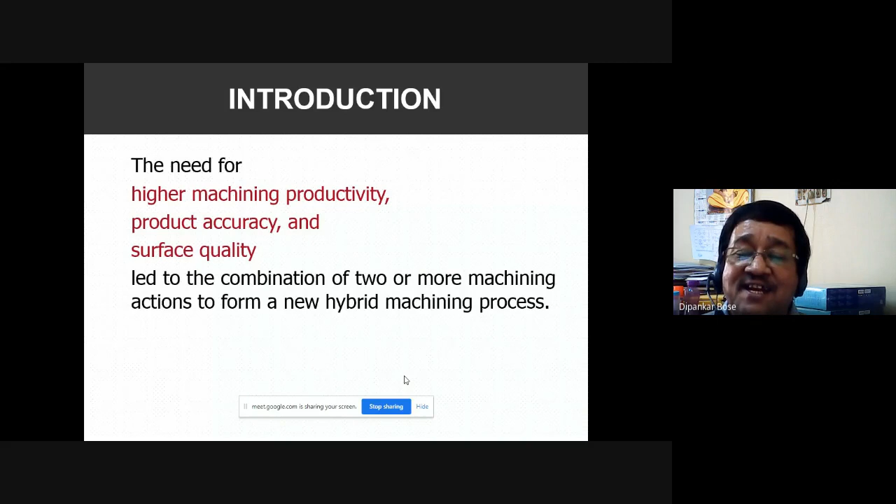Tougher material, harder material, stronger material - all these are very difficult to cut. So I am telling you one important thing - the lathe, milling, shaper, these are all conventional machines, only for mild steel. This era is gone almost.

Most important thing, even in welding operations - most colleges have welding machines that are actually transformer based. But nowadays, most welding machines are developed into inverter based, to reduce the power consumption.

Now what happens, students - what they are learning in college is transformer based machines, but when they go to industry, all machines are converted into inverter machines. So there is a lot of gap there.

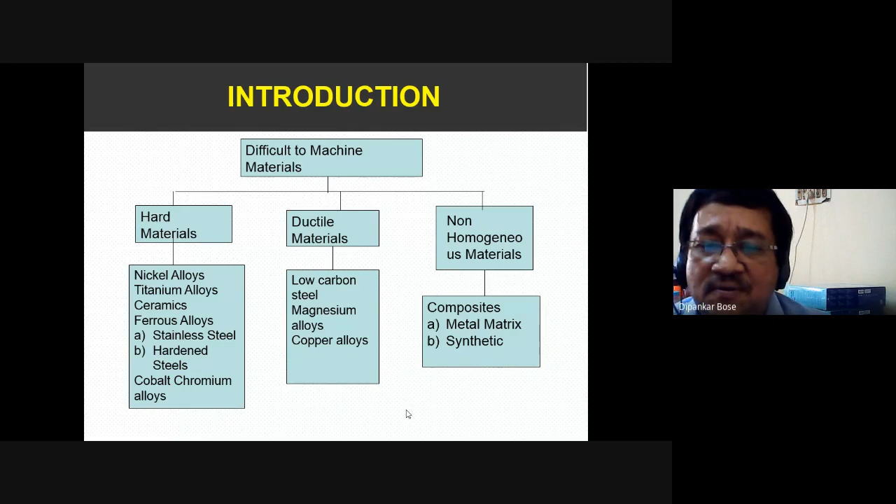Hello my dear friends, have you heard about nanotechnology? Am I audible to you? Yes sir, yes sir. So have you heard about nanotechnology? Yes sir. What is meant by nano?

The size is 10 to the power minus 9 meter. But why is it so important? You got my point? Because the property of the material changes when it is sized to nanosize. For example, suppose your graphite, your pencil lead - this is the most brittle material. But when this graphite is sized to nanoscale, it becomes the world's hardest material, called carbon nanotube. So the property of graphite changes when sized to nano. This technology is coming into use now all over the world.

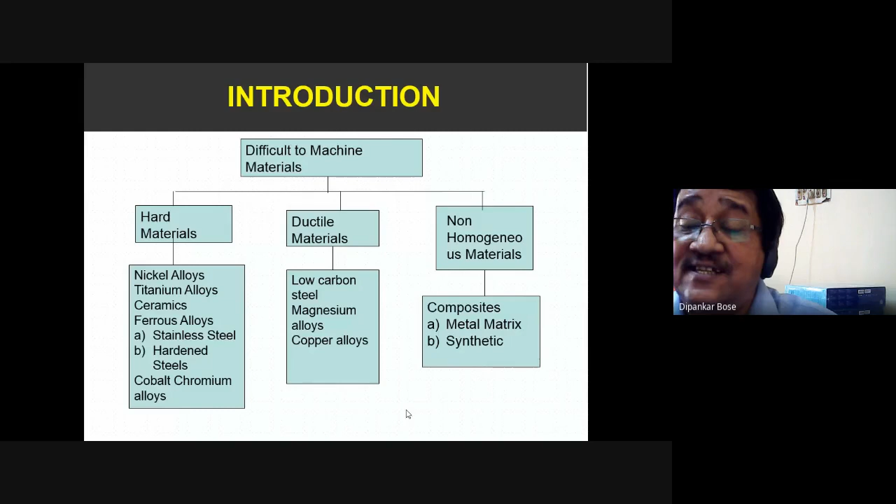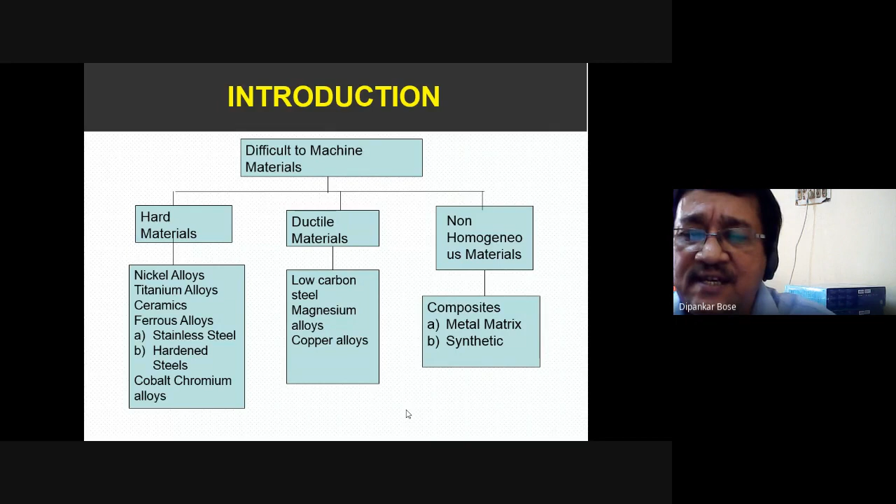But most important thing is there are some nanofluidic channels - they are doing a lot of havoc in the manufacturing world. It has been observed - I think you have heard about Intel. The owner of Intel, Gordon Moore, said that the size in a PCB, printed circuit board, you can suppose add 100 types of resistance or whatever components in a space in the PCB. After 18 months, it becomes two times - it can accommodate. But the problem is, when so many components are clubbed together, tremendous amount of heat is dissipated.

Now to remove this problem, what have they done? They have introduced nanofluidic channels. You got my point? Nanofluidic channel does not obey Ohm's law, so naturally there won't be any heat generation - it can be easily compensated by the nanofluidic channel.

Another important thing - I think all of you know about smart materials. What is that? Can anybody tell me?

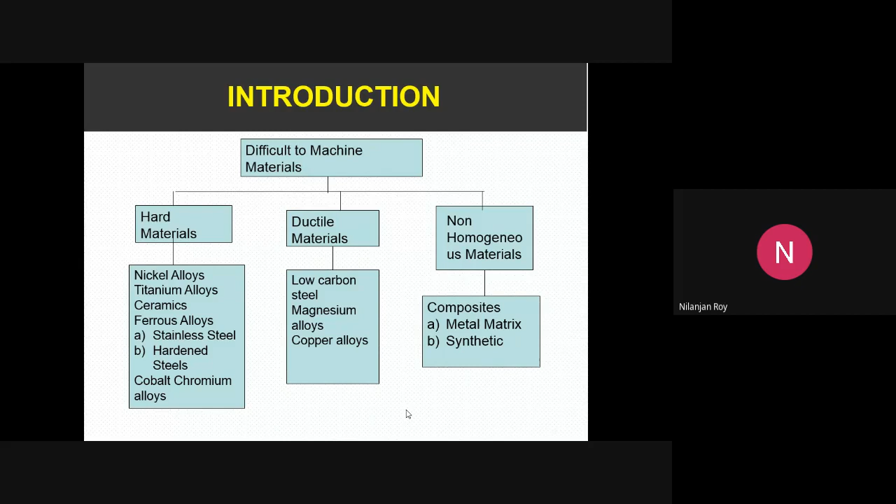Because of manufacturing world advancement - good afternoon, sir. Yes. Smart materials means they can change their shape, we can use some machining process, they can shape their shapes by their own. That means... yeah, nowadays you can see, sir, recently one material is developed - that is self-healing material. Recently. Yes, memory sir, there are memory materials. Yes sir, yes sir, another material is there.

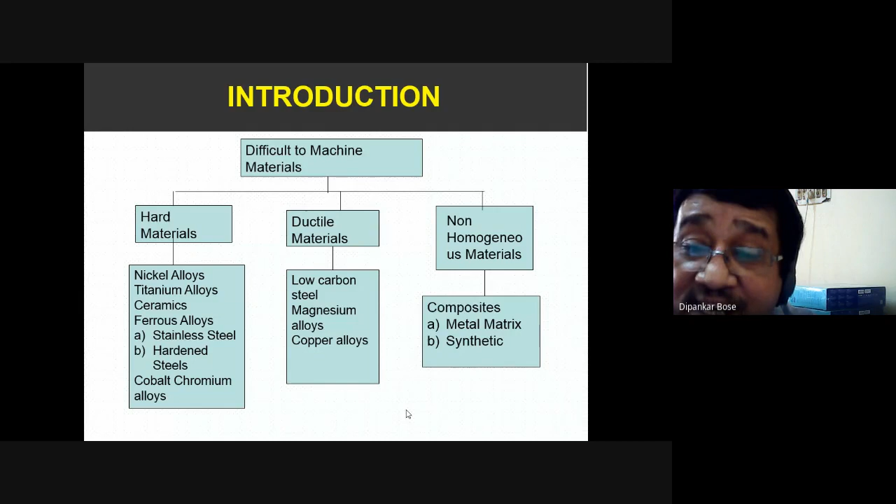Actually smart materials are non-metals, but they can conduct electricity. So the main intention for technocrats or scientists was that use of metal should be minimum. So they have developed this component, which is an organic type of component, but it can conduct electricity. So you think about your mobile phone nowadays - how much percentage is metal? Very less. You think about your new car - how much percentage is metal? Very less, in comparison to others.

Now, my dear friends, coming back to my lecture - suppose titanium. It is a very widely used material in aerospace. You know, two branches of engineering apart from computer science or IT will be very much in demand in the coming era - one is aerospace engineering, another is automobile engineering, hybrid vehicles and others. In aerospace materials, titanium is widely used, and also in medical industries.

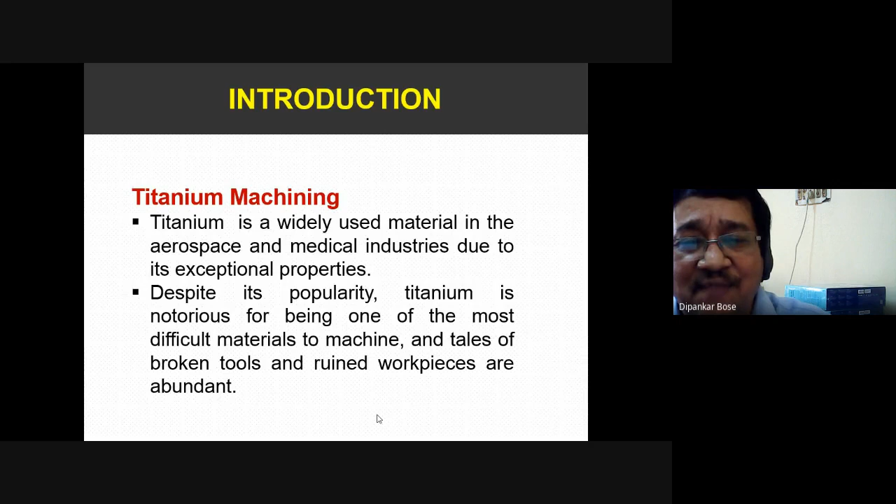It has got some exceptional properties, but it is a very notorious material - very difficult to machine. So many tales of broken tools, ruined workpieces are abundant. So titanium is one type of culprit material.

Now another important thing is Inconel machining. It is a trademarked word of Special Metals Corporation - a high nickel superalloy. It is actually resilient to corrosion and oxidation at higher temperatures when it is used, and it is also used in aerospace industry, but it is very difficult to machine because it does not get any softer when the temperature rises.

At the same time, you may think about cold working, but cold working increases its hardness, making it difficult to machine. But when Inconel is machined, its hardness increases non-linearly, wearing the tool disproportionately. So this is another difficult to machine material.

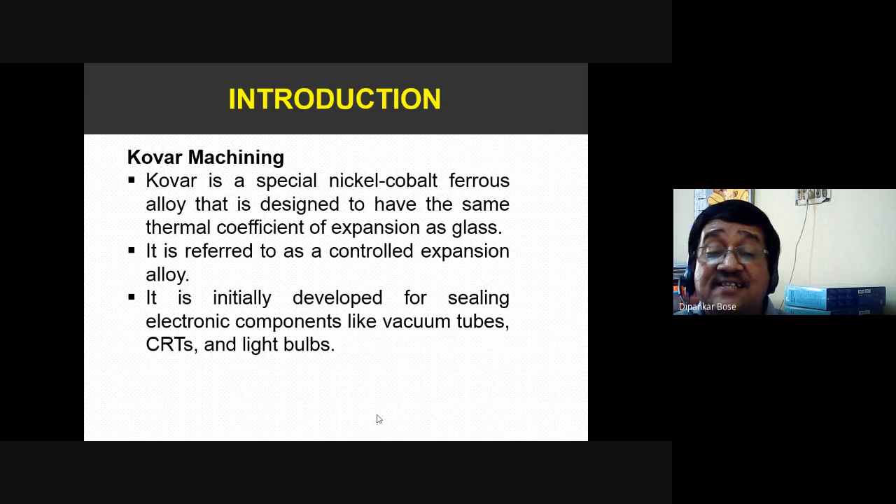Another important thing is Kovar. Kovar is also a special nickel-cobalt-ferrous alloy, designed to have the same thermal coefficient of expansion as glass. It is known as a controlled expansion alloy, and was developed initially for sealing electronic components like vacuum tubes, CRTs, and light bulbs. Normal metals don't work for this purpose because they expand and contract readily with changes in temperature, breaking the seal. So, like most nickel alloys, Kovar also exhibits work hardening when machining, slowing the machining process and even warping the work.

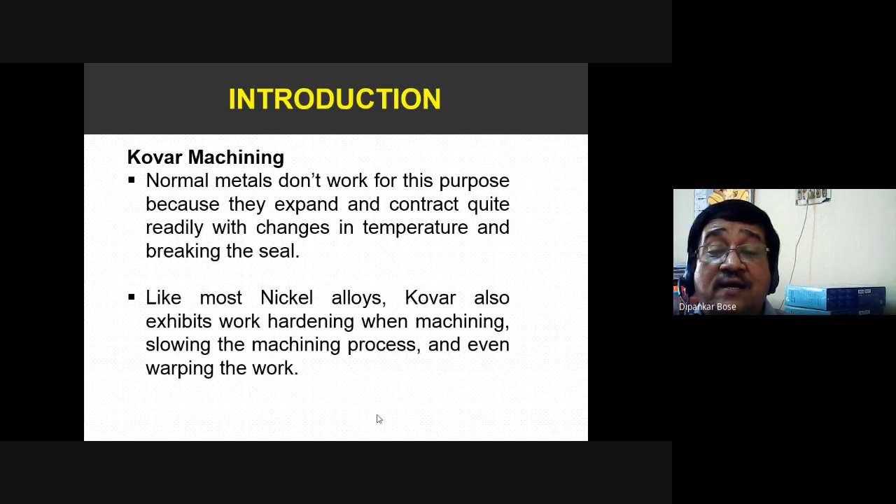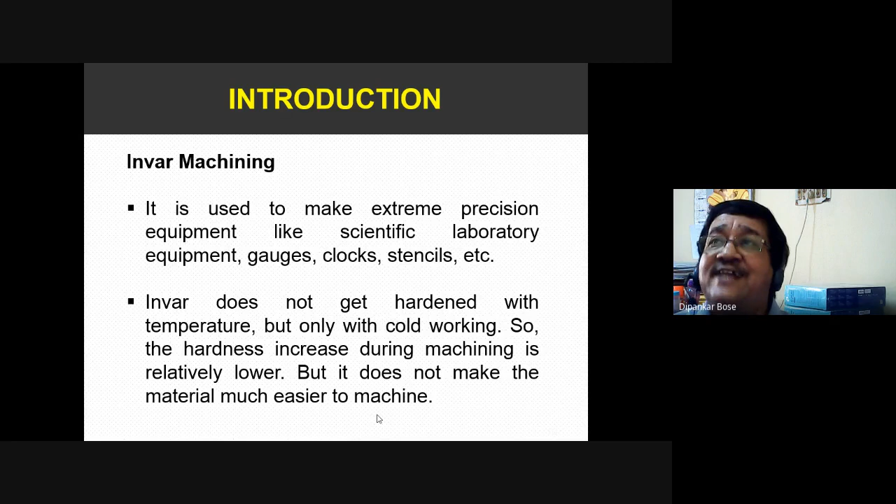Now another important thing, Invar. It is a nickel-ferrous alloy with extremely low thermal expansion. It differs from Kovar in that Kovar is a controlled expansion metal with the same coefficient of thermal expansion as borosilicate glass, whereas Invar is an extremely low coefficient of thermal expansion metal. It is used to make extreme precision equipment like scientific laboratory equipment, gauges, clocks, stencils, and the like. But another important thing is that Invar does not get hardened with temperature, but only with cold working. So the hardness increase during machining is relatively lower, but it does not make the material much easier to machine.

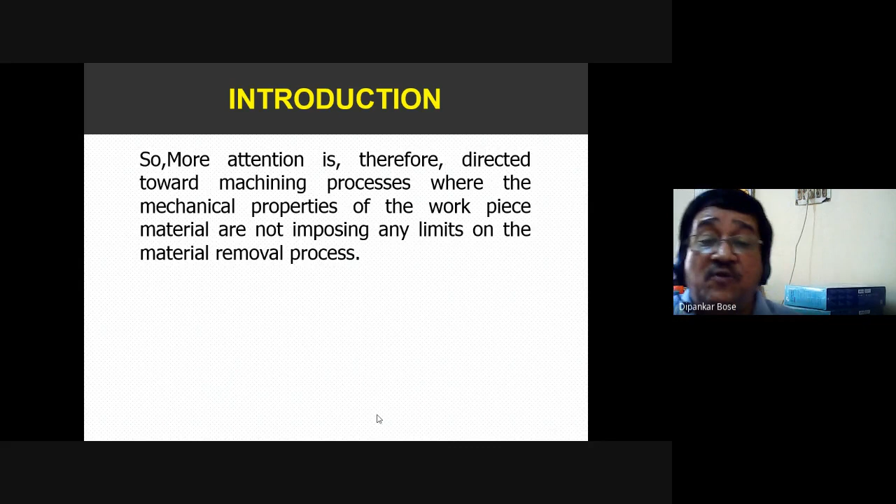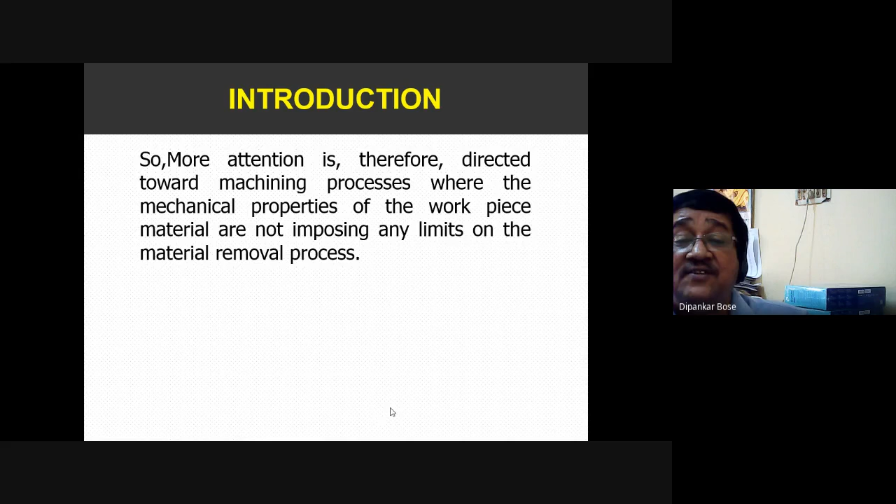So I am telling you some of the materials. There are plenty of materials that have been developed, but more attention is directed towards machining processes where the mechanical properties of the workpiece are not imposing any limits on the material removal process. So unconventional machining techniques came into practice, but this is not so much as per the requirement.

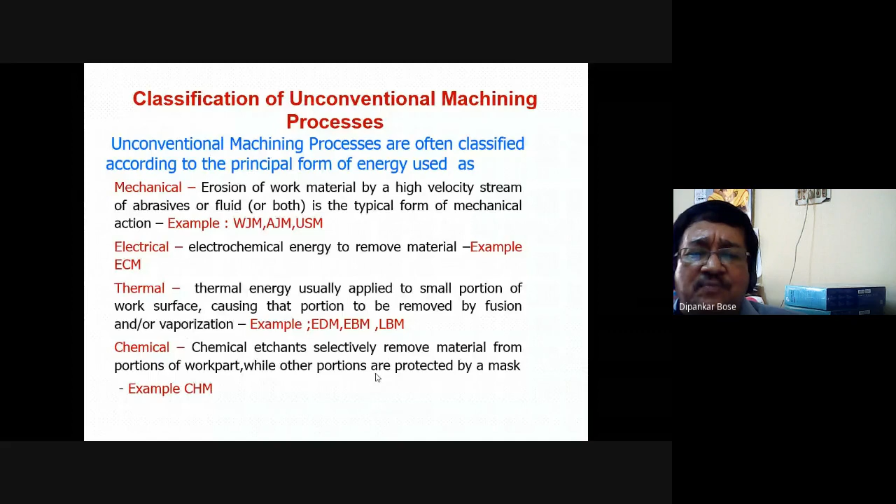So for unconventional machining, I don't want to say so many things, because everything comes into picture: mechanical type, water jet machining, abrasive jet machining, ultrasonic machining, electrical energy utilization like ECM, thermal means EDM, EBM, LBM, and chemical machining. Now, why hybrid machining?

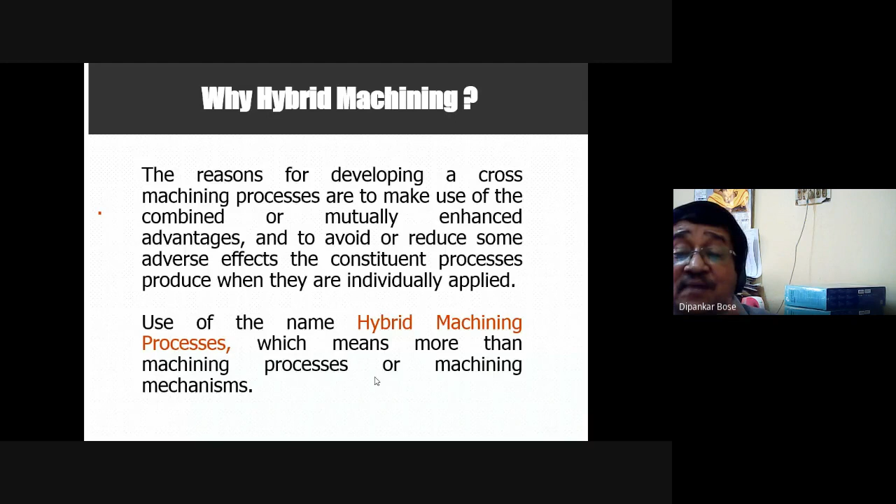Now I am coming to the picture. Combinedly, mutually enhance the advantages and avoid the adverse effects of the constituent processes produced when they are individually applied. Very nice, there are wonderful words in the definition. But why is it required? Why is it called hybrid? Because it will be more clear to you, here you see.

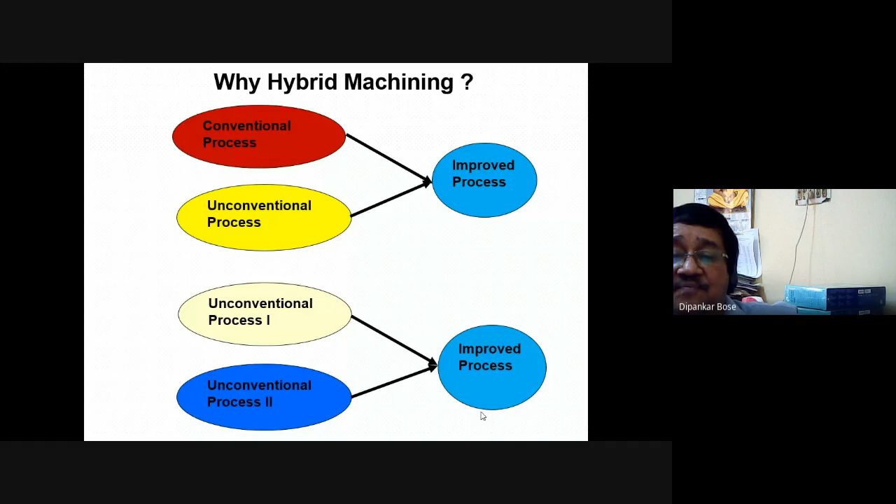Now, what are the advantages? Machinability, MRR is high, surface finish, accuracy. Long back when I worked with a die sinking type EDM machine, it used to take 5 to 6 hours to make the impressions, but we don't have this much time. We also have to make the MRR more, and at the same time, surface finish should be very accurate. So these hybrid machines will give you that requirement.

But there are some adverse effects also. Sometimes burrs are there, heat is maximum, sometimes residual stress will be there, inherent stress inside the structure, all these things. But if you consider, the advantages are more than the adverse effects.

Now, there are two categories of hybrid machining process: one where the processes are directly involved in the material removal. Another type of hybrid machine is there, where one will be the most principal machine, and others actually give some assistance to have better MRR and surface finish. Always remember the most important thing: why this hybrid machine? The main intention is better MRR as well as quality of the product.

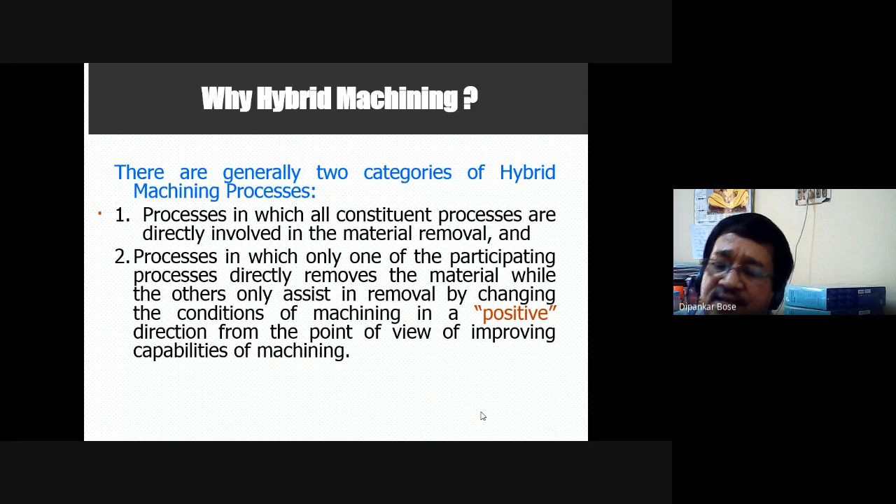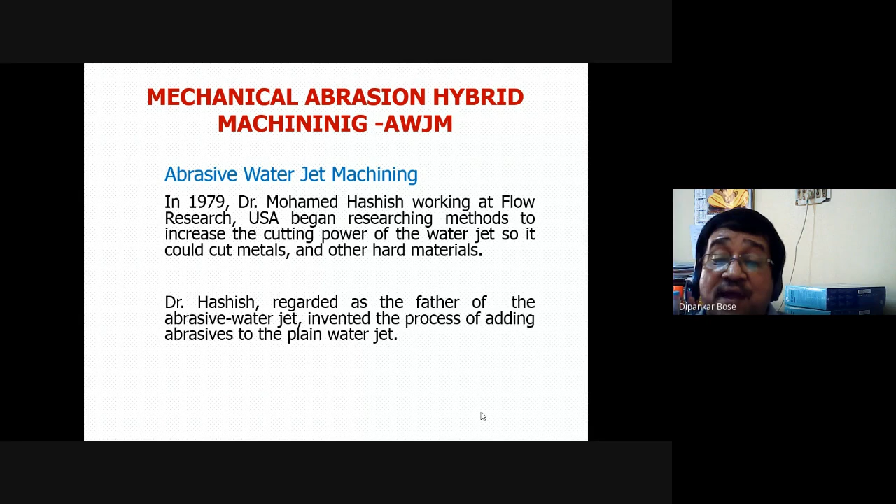Okay, my dear friend, first hybrid machining - I think all of you have heard of abrasive water jet machine, and it is not a very old one. In 1979, Dr. Mohamed Hashish, working at Flow Research in USA, started researching methods to increase the cutting power of the water jet so it could cut metals and other hard materials. Dr. Hashish is known as the father of the abrasive water jet, and invented the process of adding abrasives to the plain water jet. He used garnet abrasives, the same as used in sandpapers. Water jet containing abrasive could cut virtually any material.

In 1980 - how many years back? 40 years back - abrasive water jets were used for the first time to cut steel, glass, and concrete. And in 1983, the world's first commercial abrasive water jet cutting system was sold for cutting automotive glass, when the development was taking place for automobile engineering. At the same time, there were some sister organizations used to process the automotive parts, for how to cut and how to machine it.

Then this abrasive water jet machining is there. There is a saying in the industry that in a workshop, if you don't have a water jet machining setup, it is just like a carpentry shop without a hammer.

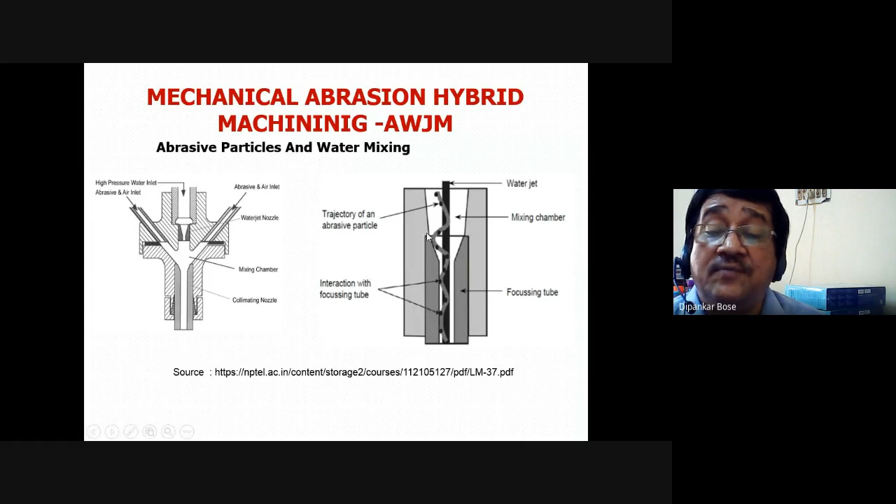So this is the way you can make the nozzle of this abrasive water jet. Now, my dear friend, please see how many intricate parts have been developed by this abrasive water jet. Can it be possible by our conventional machining?

No, sir. These are the things actually. But you are all very capable engineers here, those who are listening. You can develop this type of setup. It is only, your intention is required. Otherwise, innovate.

The owner of Facebook, Mark Zuckerberg, what he said about Indians, or his partner, I forgot who told this, but the statement is that Indians are very good in studies, fine. They are getting good jobs, they are purchasing Mercedes, but where is the innovation? You got my point? Am I right?

Whenever faculty members are coming to my place for training, I ask them, how old is your college? Fine, 20 years, 30 years, 10 years, somebody is 80 years. But when I ask, have you developed any product which is required for your surroundings and others, for mankind and others? The answer is a big zero. It is not their fault or our fault. Our education system is like this only. So this is the case.

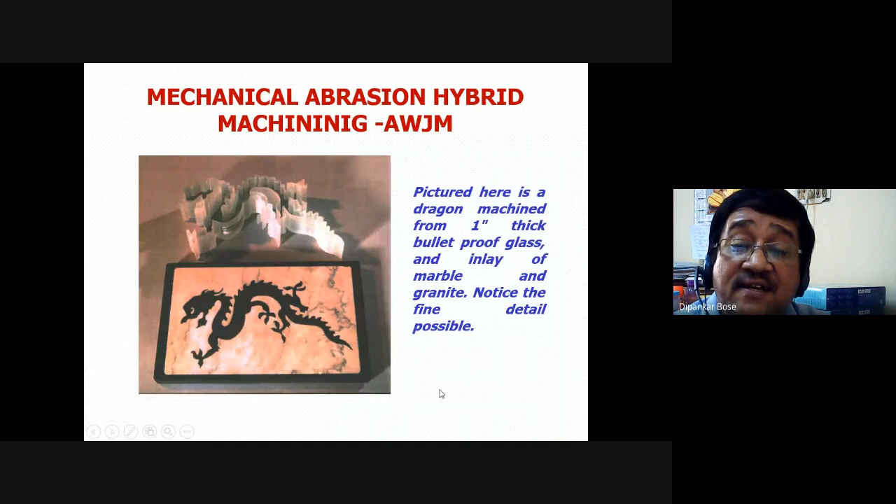Now, another hybrid machining is there. It is called laser hybrid welding. Do you have any idea? It is a combination of laser light and electrical arc.

Now, in welding, the most important thing is that MIG welding is the most versatile one. Why? Because when MIG welding is going on, there is no stoppage of continuous welding rods you are getting. It is an automated system.

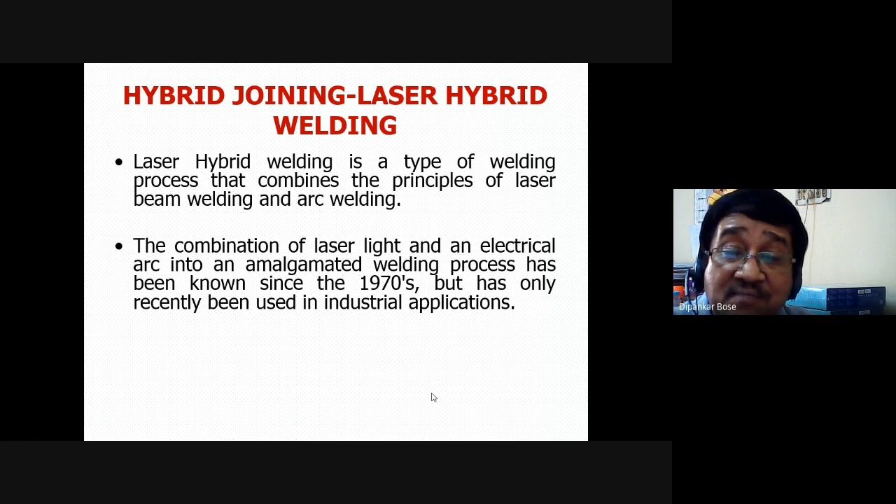So MIG welding and laser welding, both are combined. But it's difficult for TIG welding, because in TIG welding you need to keep the stick and your torch very minutely. TIG welding is an artist's welding, you got my point. But MIG welding is utilized for hybridization. With laser and MIG, if you visit most automobile industries, the joining of different parts of that car is done through hybrid machining. You got my point? So, laser hybrid welding.

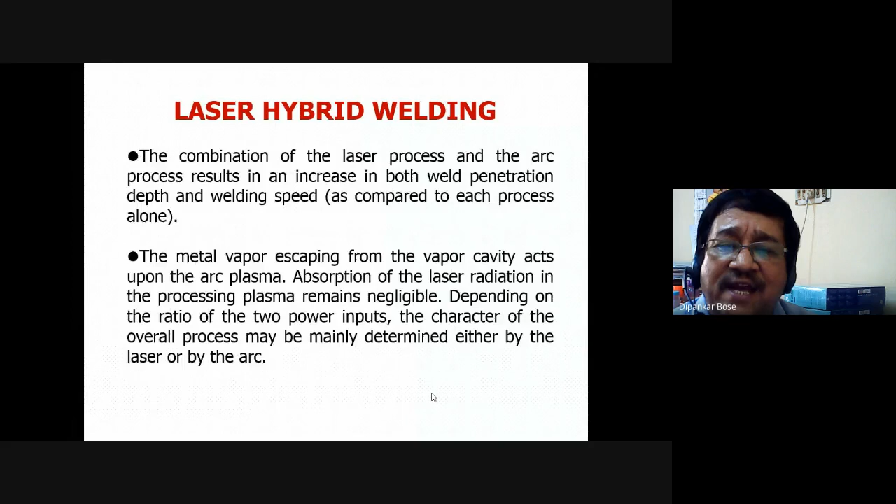See, my dear friend, what is MAG welding? What is MAG welding?

So it is very, very interesting. What is the job here, MIG welding or mag welding? Deposition. But what is the job of laser beam? Penetration. If you get the deeper penetration, quite obviously MIG welding will give the joining more deeper way. So the welding will become more strength, everything will become better.

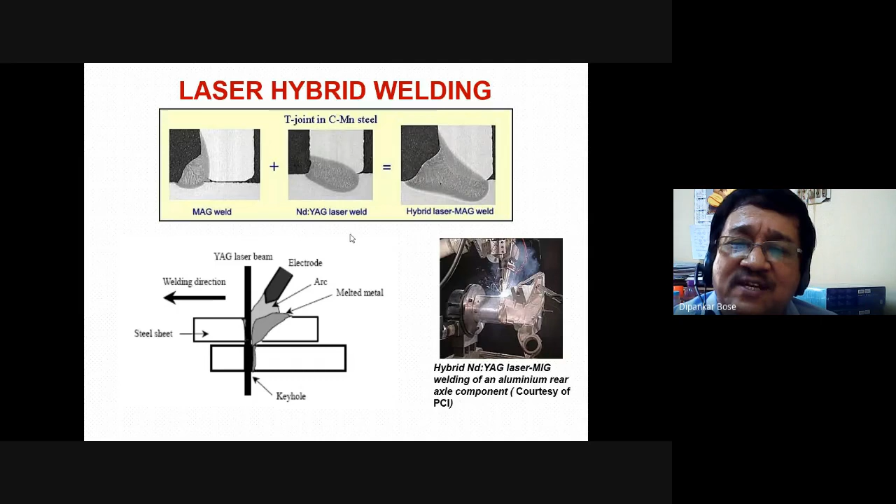Another important thing is that this is a very versatile welding, MIG and laser hybrid welding. Any question? And here you see, it is a joining of carbon manganese steel. Got my point? So this is a very unique type of process, and everywhere you go - Telco, Ashok Leyland, Maruti manufacturing unit - everywhere the common thing is that they are using laser hybrid machines.

Now first of all, let us think about hybrid electrochemical processes. ECM, Faraday's law. In our school level, we have learned about electroplating. Electroplating is deposition of material. But in ECM, electrochemical machining, it is the reverse - it is the removal of material. The mechanism is known as chemical dissolution or electrochemical dissolution.

Now, when this machining process is enhanced by using mechanical machining action or thermal assistance, ultimately what happens? What is the requirement? Higher MRR and improved surface quality. So if you think about thermally assisted processes, you can use laser beam, which heats the inter-electrode gap and enhances the dissolution process in laser assisted chemical etching. It is known as LAE, or laser assisted electrochemical machining.

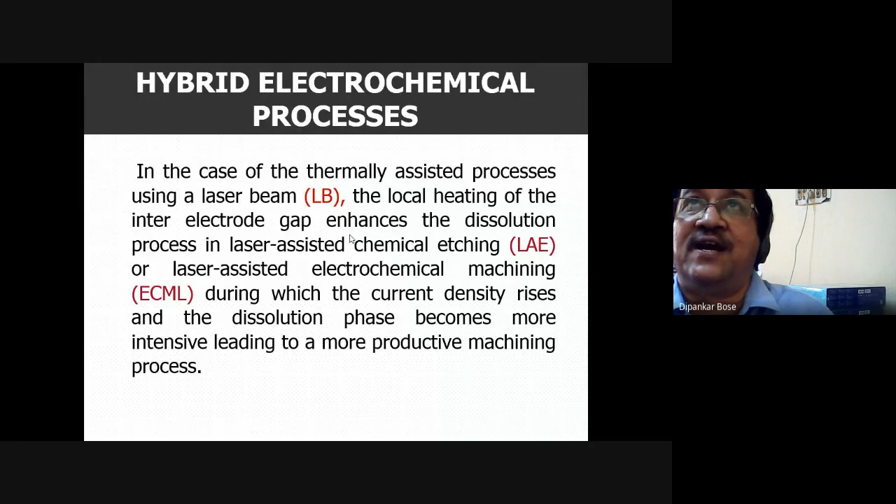During which, one most important thing - always remember when you are doing some machining operation, current density, current per unit area. The main intention is to raise that current density, and the dissolution phase becomes more intensive, leading to a more productive machining process. Why is this hybrid machining coming into picture? That is machining of difficult metals, but most important thing is to increase the MRR as well as the surface finish.

So there is a term called mechanical abrasion. It is combined with ECM and lot of hybrid processes - electrochemical grinding, electrochemical honing, and electrochemical super finishing. All these things, these are all hybrid processes, right?

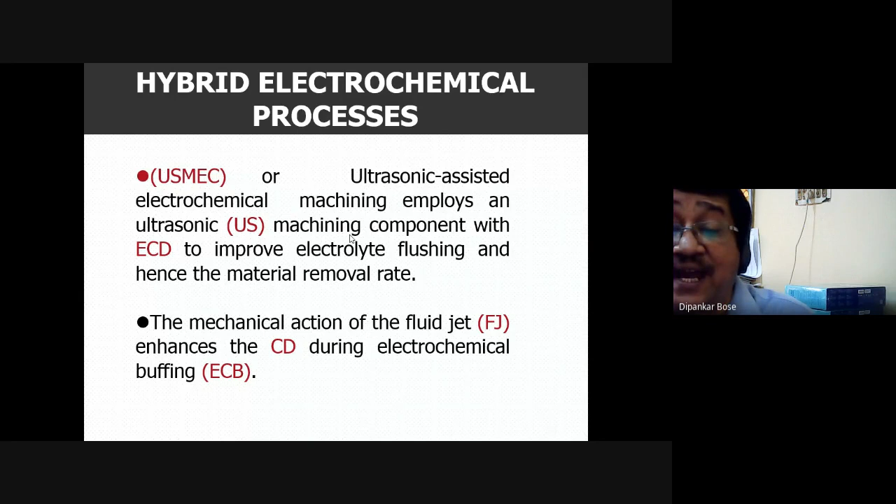So another important thing, when USMEC, ultrasonic assisted electrochemical machining, which employs an ultrasonic machining component with ECD to improve electrolyte flushing and hence the material removal rate. Again, the demand is to increase the MRR. Another important thing, the mechanical action of the fluid jet which can enhance the chemical dissolution during electrochemical buffing, that is finishing, ECB.

When ECD combines with laser beam, you are getting ECML. When ECD combined with mechanical action, you are getting electrochemical grinding, electrochemical honing, electrochemical super finishing. Okay, so you see how many new techniques have been developed.

And in India, IIT Kanpur, Roorkee, as well as Jadavpur University Production Department - they are developing some of these types of hybrid machines. Now it is your turn. You can develop this type of hybrid machine. Actually, what is the main target? Higher MRR and surface quality. For that, you can develop anything.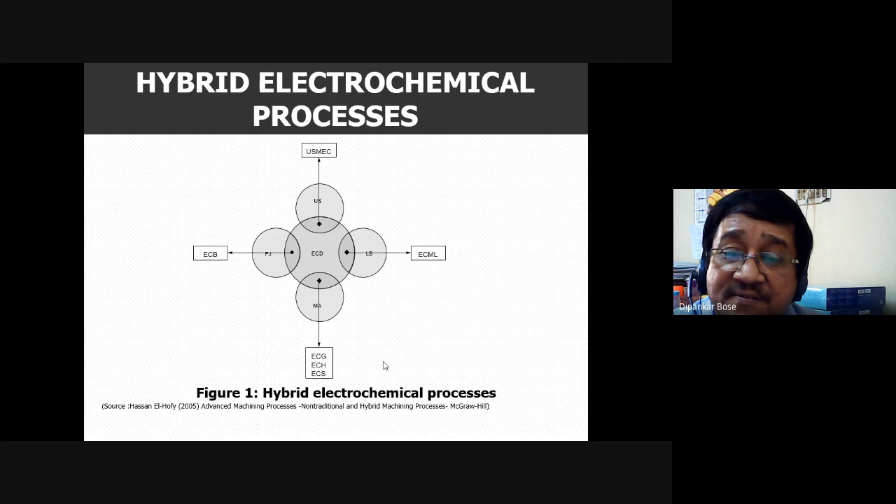Any question? Am I clear to you? Hello? Yes, sir. Are you getting interest on this? I think, yes sir, yes sir.

Okay, thank you. Now another important thing is electrochemical grinding. Grinding we know, but in ECG, it utilizes a negatively charged abrasive grinding wheel and electrolyte solution and a positively charged workpiece. The process is similar to ECM, but the cathode is a specially constructed grinding wheel instead of a cathodic shape tool like your conventional ECM. And there are some insulating abrasive materials - it may be diamond or aluminum oxide - and the grinding wheel is set in a conductive bonding material.

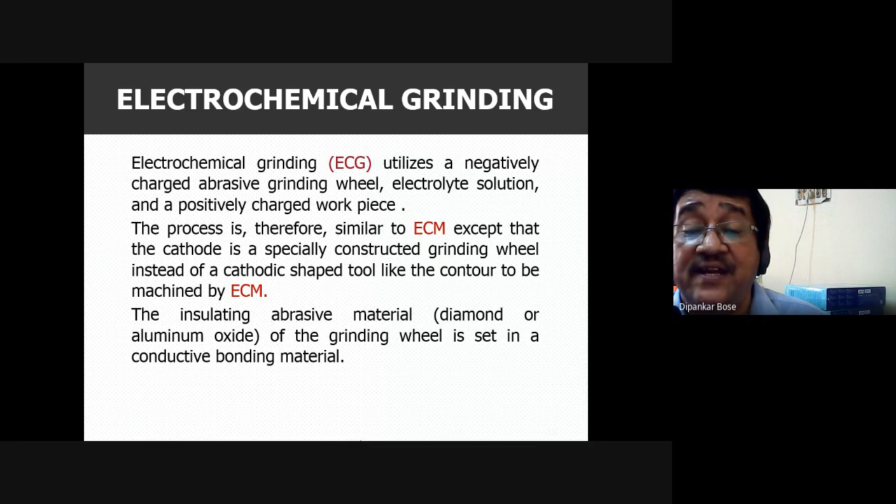Now, my dear friend, you can think about that. In ECG, the non-conductive abrasive particles act as a spacer between the wheel's conductive bonds and the anodic workpiece. Now there is always an inter-electrode gap that is very much important - it is 0.025 millimeter or less, and it is servo controlled. A constant distance is maintained.

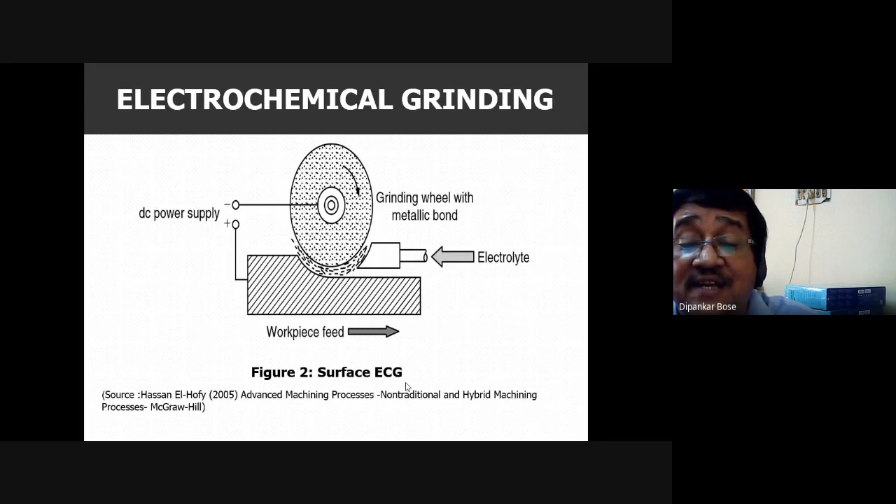Okay, now here you see, my dear friend, this is a very interesting one. Your conventional grinding machine, when it is coupled with the ECM principle, it becomes surface ECG. You got my point? So a newer true technology - ECM as well as the conventional mechanical abrasion like grinding - you are combining to get one hybrid system.

Electrolyte is generally sodium nitrate provided to ECD, and wheel abrasive particle grit sizes range from 60 to 320. There are so many research areas here. If you can develop a machine, you can find out the optimum abrasive particle size and grit size. That is also one research area.

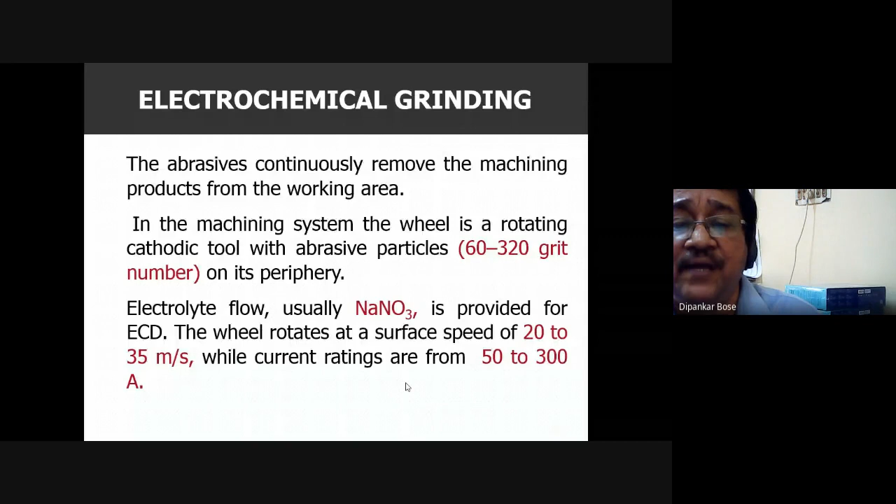Now another important thing: the wheel is rotating at a surface speed of 20 to 35 meters per second, and current rating is 50 to 300 ampere. When a gap voltage of 4 to 40 volts is applied between the cathodic grinding wheel and the anodic workpiece, a current density of about 120 to 240 ampere per centimeter square is created. This is a very wonderful development, this current density. Current density generally depends on the material being machined, gap width, and the applied voltage.

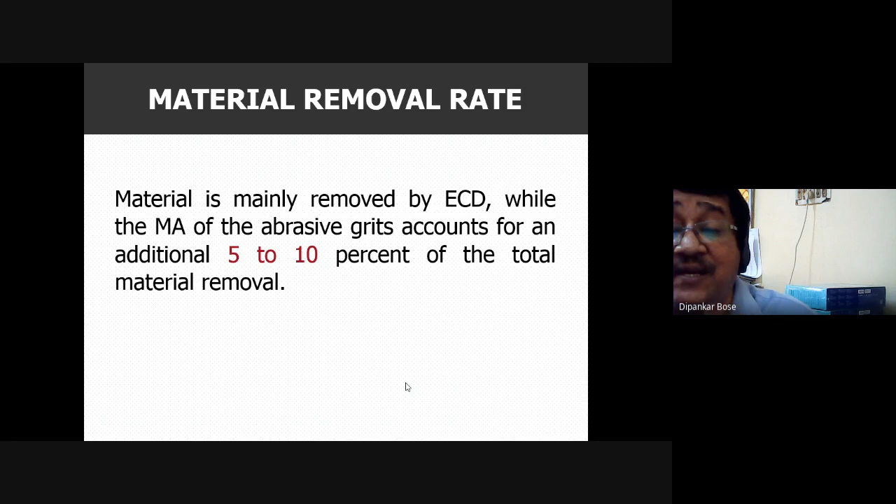Now, material removed by ECG - always remember in ECG, the main portion of the material is removed by ECD only, and mechanical action, the abrasive grits, accounts for only 5 to 10% of the total material removal. So here you see, this is the total component.

Can you develop this type of machine? Yes sir, yes sir, you try this. I am telling you, innovative mind is required nowadays, and you will get this innovation from students also. Only you guide them, you will get the results.

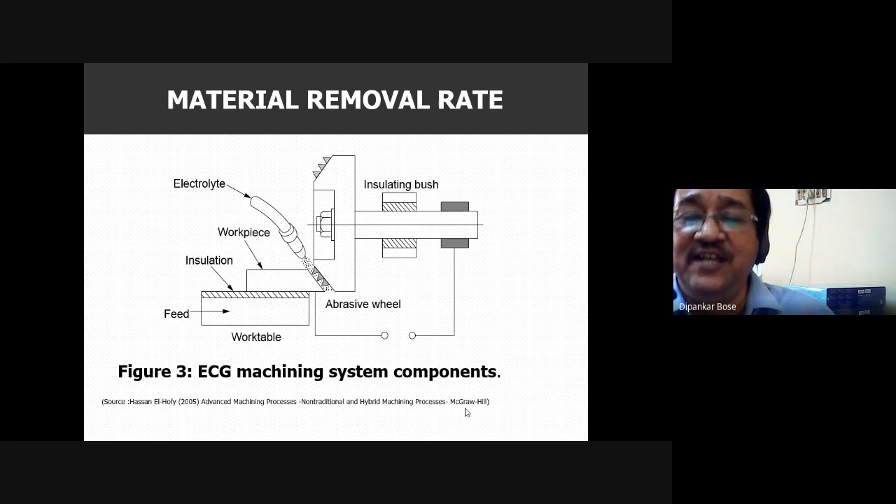Now, one important thing is that the removal rate by ECG is 4 times faster than any conventional grinding. And it always produces burr-free parts that are unstressed. The volumetric removal rate is typically 1600 millimeter cube per minute.

So ECG is a hybrid machining process that combines mechanical abrasion and ECM. This is the beginning. Earlier I told you, first was abrasive water jet, then laser hybrid. Now it is ECG, electrochemical grinding operation.

Now here you see, my dear friend, the flowchart. Ultimate product is ECG, so here ECM plus mechanical grinding. So there is an ECD phase and a mechanical abrasion phase - the ECD phase involves ions, and for the mechanical phase, abrasives, and as the abrasive tool, this is a cathode and workpiece, ionization takes place. But what is actually the main plus point? By combining both ECM and mechanical grinding, you will get a better removal rate.

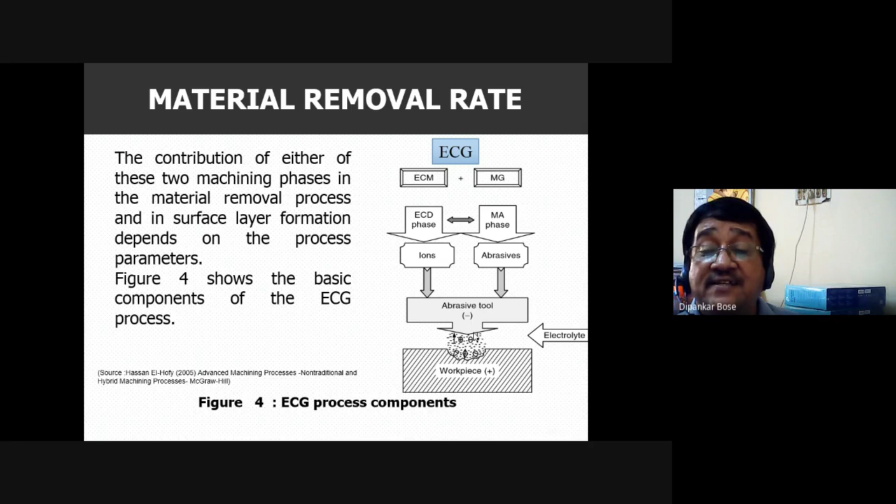Why is this very popular? The machining parts made from difficult-to-cut materials such as sintered carbides, creep-resisting Inconel, nimonic alloys, titanium alloys, and metallic composites. So generally, you can produce tungsten carbide cutting tools, fragile parts, and thin-walled tubes by this ECG.

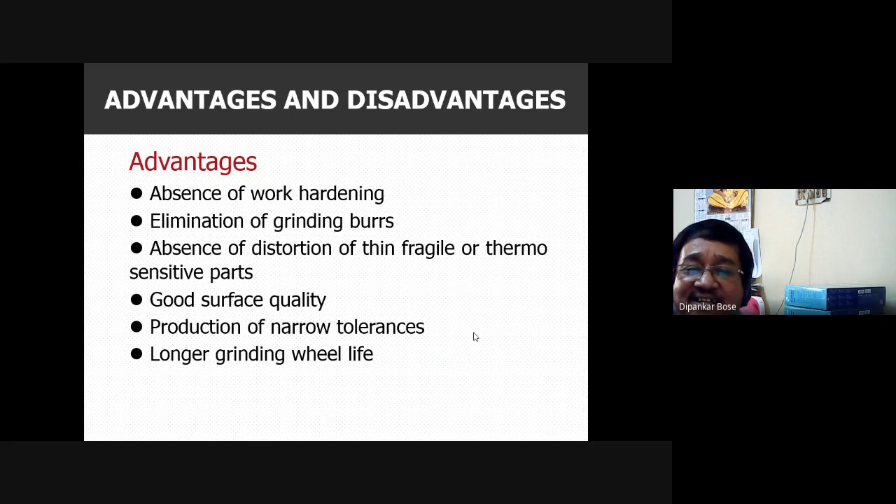What are the advantages? Advantages are too many: no work hardening, no burring, no distortion of thin, fragile or thermosensitive parts. Surface quality is very good, and it can even produce very narrow tolerances and longer grinding wheel life.

Disadvantages are there too - capital cost is high, and another limitation is that it is limited to electrically conductive materials, along with the corrosive nature of the electrolyte. Also, disposal and filtering of the electrolyte is always necessary.

Now, my dear friend, another technique - what is ultrasonic machining? Can anybody tell me? If I tell you to make a small square hole in glass, what non-traditional machining technique will you take? It is a brittle material, so generally we use the ultrasonic machining concept.

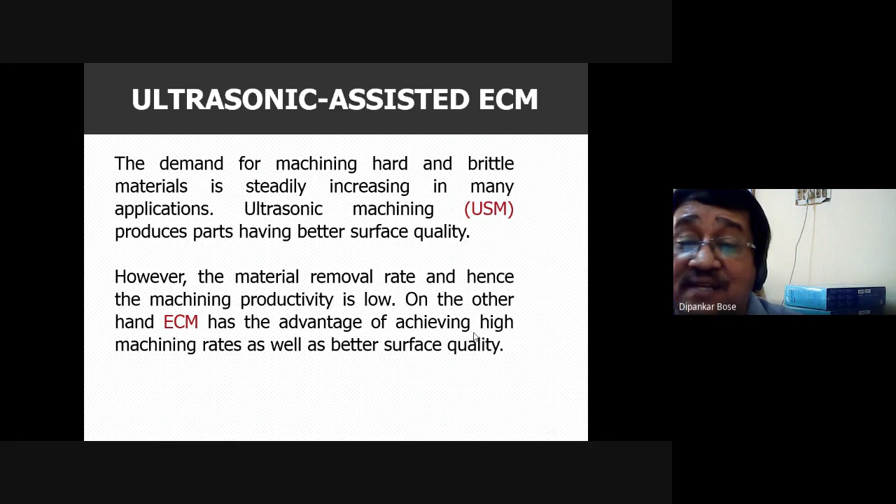Now, when ECM is coupled with ultrasonic non-traditional machining, it becomes another hybrid system. Sometimes it can be very effective. ECM is only effective for machining conductive materials, and ultrasonic machining is suitable for hard and brittle materials like ceramics. So, it is not so effective when using composite material machining.

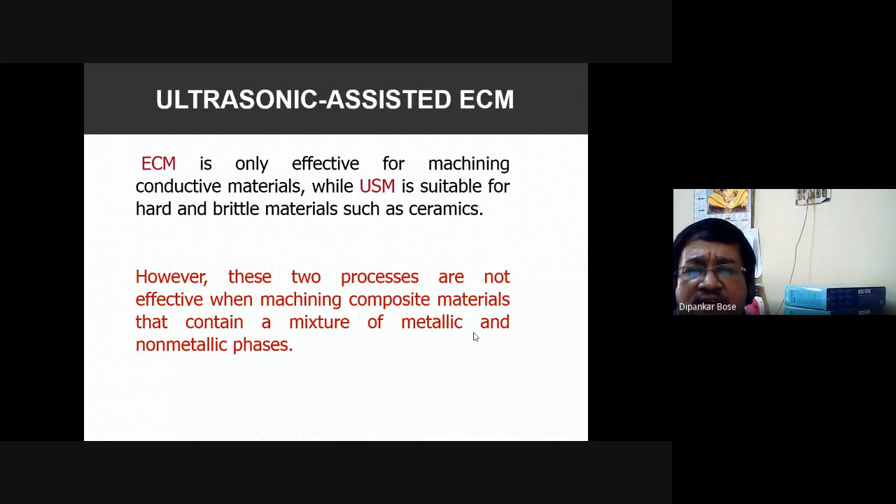So merging these two processes when you are machining difficult to machine composite material. Ultrasonic assisted electrochemical machining, known as USMEC, combines ECM to remove the metallic conductive part, and ultrasonic machining for removing the non-conductive hard and brittle phases. That's why this ultrasonic system and ECM are coupled.

Generally, ultrasonic has a transducer called a horn. The tool is vibrated, but at the same time electrolyte plus abrasives are fed into that. This is a combination of ECM as well as ultrasonic machining. That's why it is called USMEC.

Generally, voltage of 3 to 15 volt DC is normally used, and current density is between 5 to 30 ampere per centimeter square. So this is another hybrid.

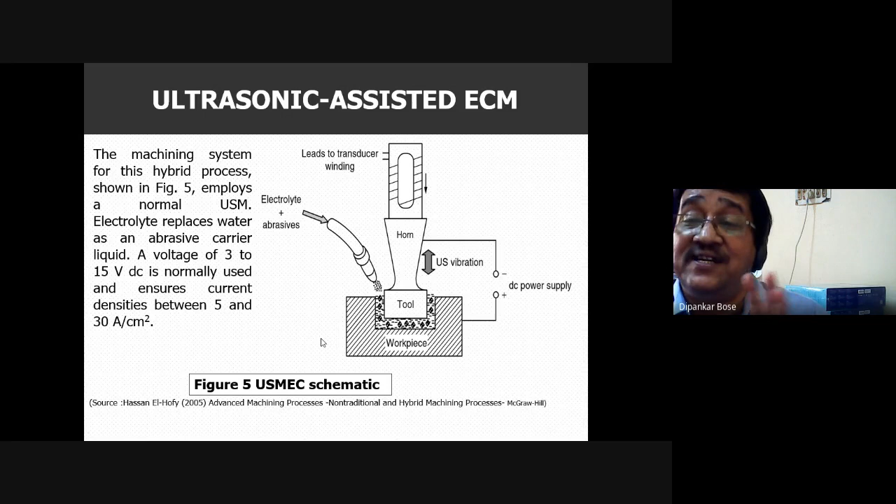Nowadays, non-traditional machining has become traditional machining because of the materials you are developing. But now these hybrid machining setups have become the real non-traditional machining setups. Am I right?

Now here you see USMEC. What is that? It is a combination of ECM plus USM. Then electrochemical dissolution phase, ultrasonic machining phase, ions, abrasive tool - ultimately electrolyte plus abrasives give you the work done.

Recently, I have purchased one ECM, macro ECM system. It can work effectively with Inconel material and others. But combining ECM with other systems we couldn't do because the machine is very costly, 20-25 lakhs. So afterwards I will see what development we can have.

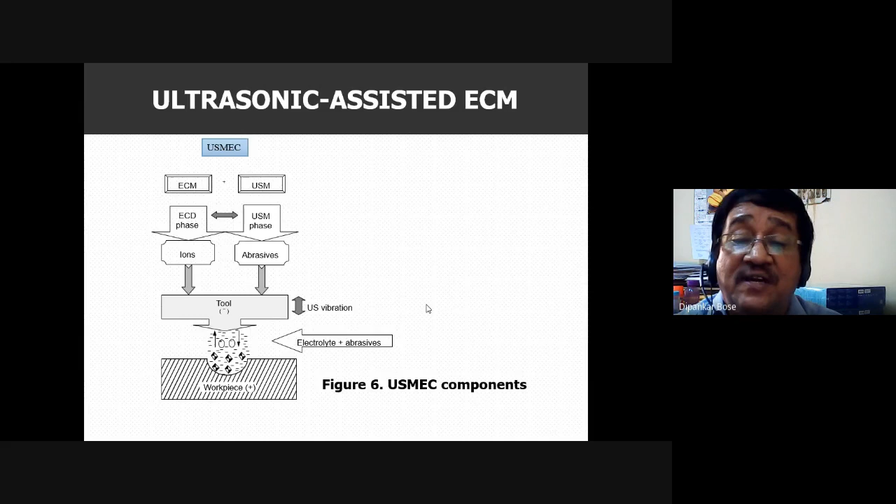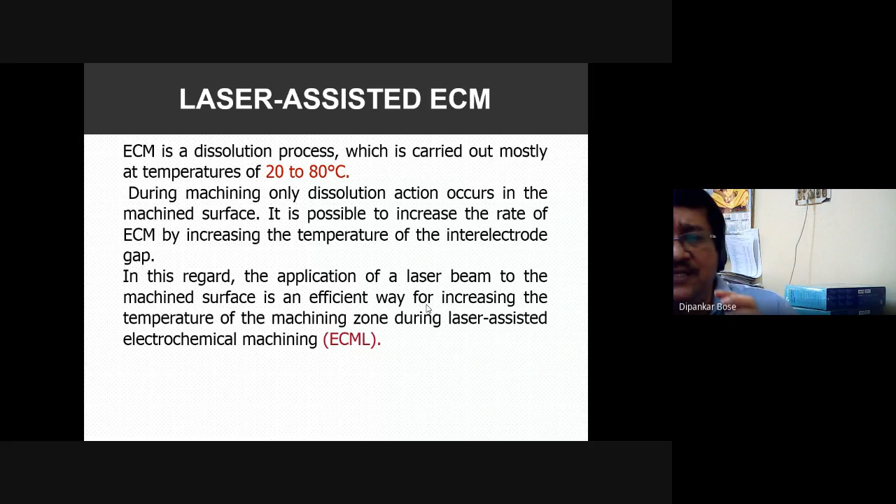So this ECM is actually carried out at temperature between 20 to 80 degrees centigrade. But when you are doing machining with ECM, only dissolution action occurs on the machined surface. So it is possible to increase the rate of ECM by increasing the temperature of the inter-electrode gap.

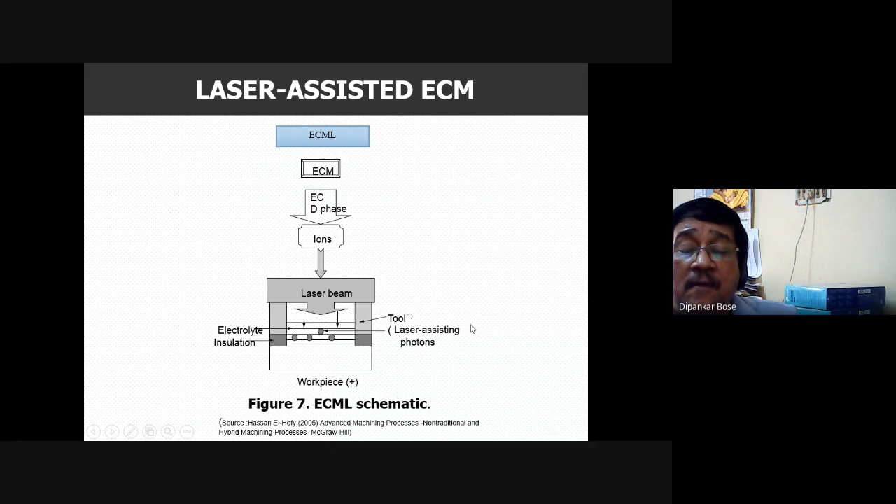So this is another hybrid machine. Now, hybrid thermal processes.

Thermal process means - can you give one example of thermal non-traditional machining setup? Any thermal machining can be assisted with electrochemical dissolution and mechanical abrasion.

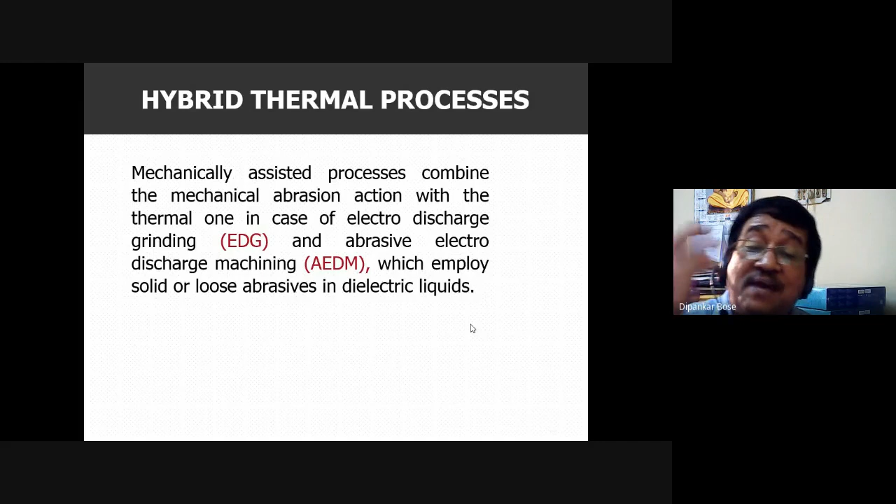Higher MRR and improved product quality result. But in hybrid thermal processes, if you bring electro-discharge machining (EDM) into the picture, there is a term called electro-discharge grinding and abrasive electro-discharge machining, known as AEDM. It employs solid or loose abrasives in dielectric liquid.

Again, when electro-discharge machining is combined with ultrasonic, another combination is made known as EDMUS. It introduces ultrasonic vibration to the tool that enhances the electro-discharge action, but at the same time cavitation is very desirable. Cavitation generated by this vibration enhances the EDM by improving the dielectric flushing.

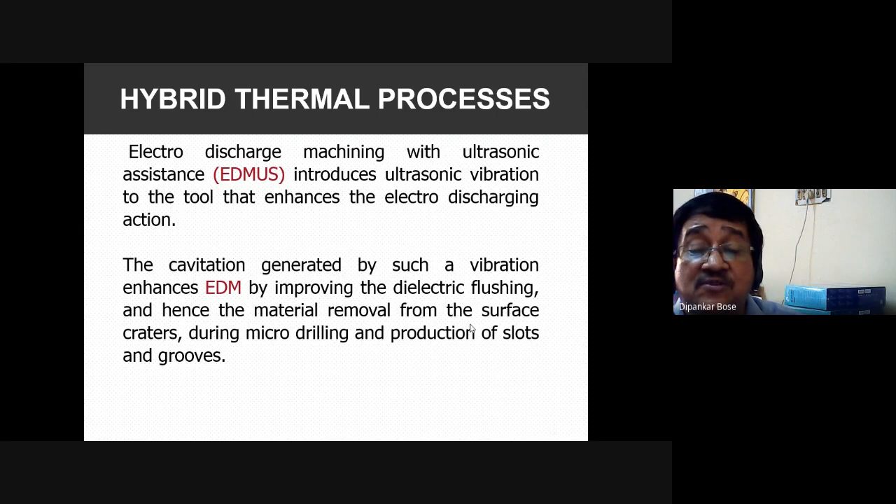So MRR increases from surface craters during micro drilling and production of slots and grooves. There is a triplex hybrid machining that adds material removal from the EDE phase to the ECD phase and mechanical action. So it is called electrochemical discharge grinding.

Now, my dear friend, you see this. One is the EDE method - electrodischarge, then electrochemical discharge, mechanical action. When electrodischarge with mechanical action are combined, we are getting electrodischarge grinding or abrasive EDM.

But when ultrasonic is coupled with EDE, we are getting EDMUS. When electrochemical dissolution (ECD) is combined with electrodischarge erosion, we are getting ECDM or EEDM. So, my dear friend, so many combinations you can make and you can develop a newer product.

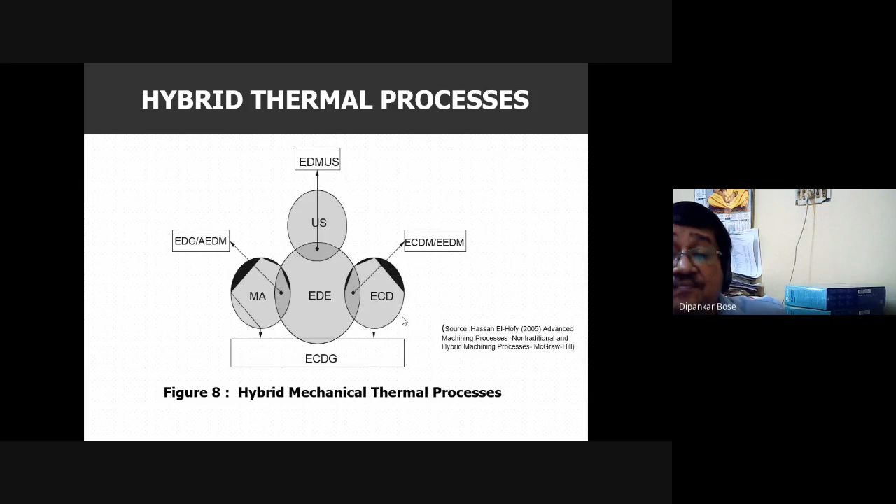Now let us think about electrochemical grinding. A new system has come, known as electrodischarge grinding. By taking the principle of EDM and combining it with grinding, we can increase MRR and other parameters.

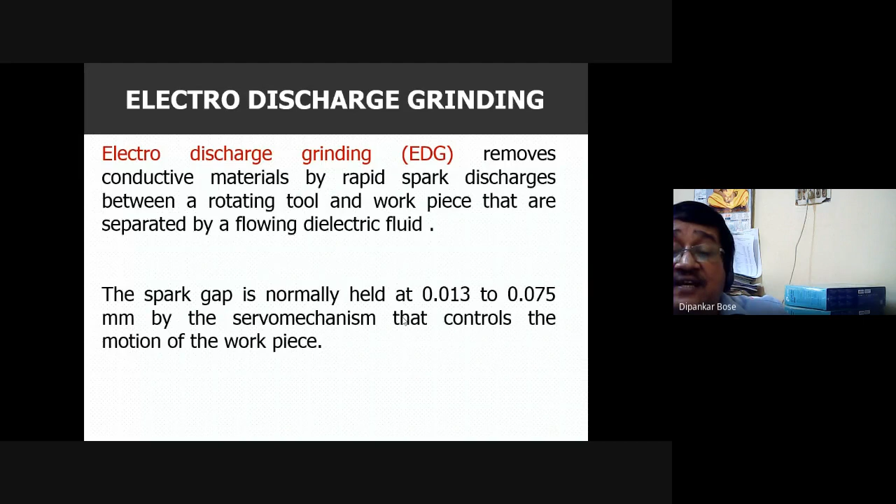These are some parameters, like higher machining current. This is electrodischarge grinding. Remember, earlier we discussed electrochemical grinding. Now electrodischarge grinding uses the same process, with a non-abrasive metallic wheel and dielectric fluid.

Sparks are generated here, and this is the workpiece. We are sending electric discharge between cathode and anode. In this case also, maximum material removal takes place by the electrodischarge method, with only 10 to 15% generated by mechanical action.

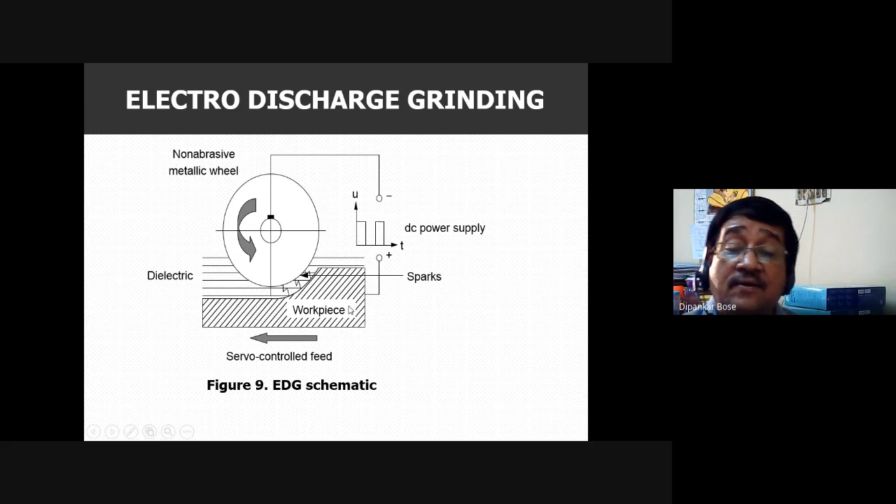Now, my dear friend, another technology. Are you getting interested in what I am telling you? Yes sir, you can ask so many things to me, and if I can answer, I will. But nowadays, my dear friend, who is your best friend? My best friend nowadays is Google. Whatever you want to know, you get the information at that particular instance.

YouTube, excellent methodology. In teaching methodology, do you know what is blending method? Blended teaching method, anybody? I am giving you one example. Everybody is telling bad things about Corona, but I am telling you the positive thing is that we adopted very fast use of virtual mode teaching. Otherwise, if required, it would have taken another 2 to 3 years to learn all these things. But now, according to necessity, we are doing it.

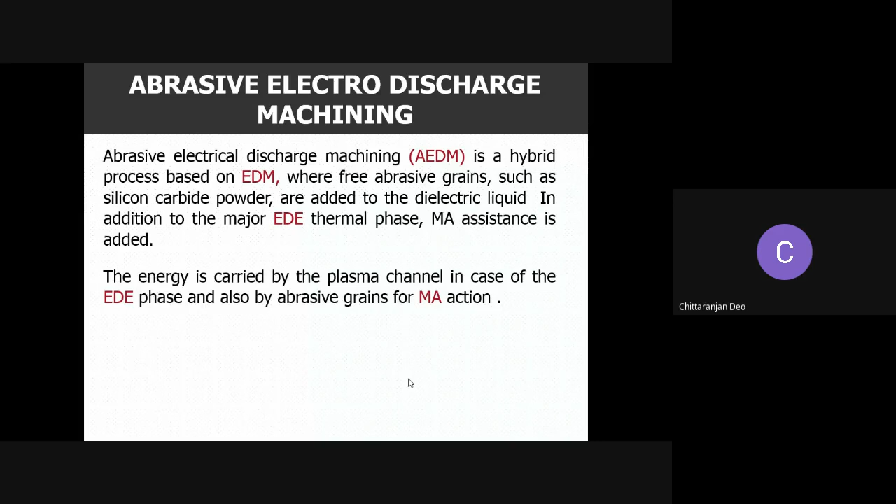What is your idea about this blended type of teaching? Sir, it is a nice one, and I think it is more effective for students to understand things and clear their doubts within a short span. So my request to you, Deoji, you can start this technique. Yes sir, that will be very useful, it is a very useful method nowadays.

Now another important thing, coming back to our business. That is the abrasive electrodischarge machining, simply known as AEDM. It is a hybrid process based on EDM, where free abrasive grains such as silicon carbide powder are added to the dielectric fluid.

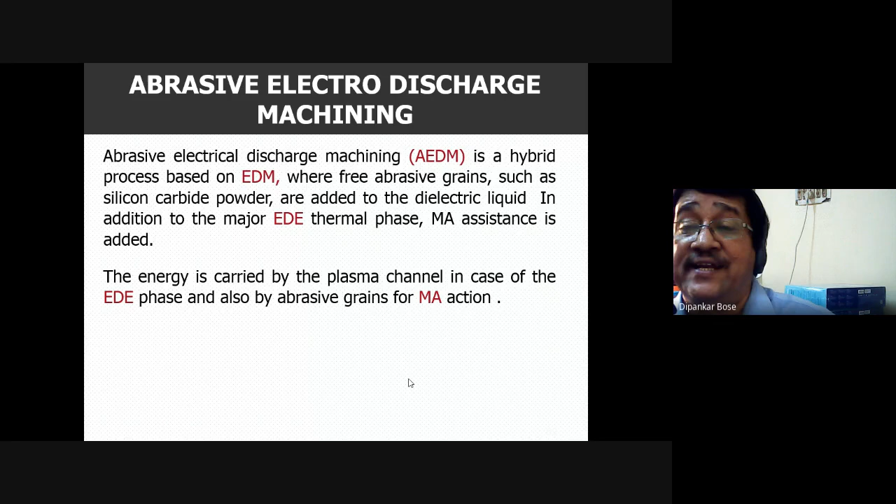In addition to the major EDM thermal phase, mechanical abrasion assistance is added. So the energy carried out by the plasma channel in the EDM phase is also assisted by abrasive grains for mechanical action. The machining media consists of dielectric and solid particles. But mixing silicon powder into the dielectric reduces the electrical capacitance across the discharge gap by increasing the gap size. As a result, there is better dispersion of spark and improvement in discharge characteristics, especially in machining of large workpieces.

All these types of hybrid systems were developed as per the necessity. Necessity is the mother of invention, we know. So these things have actually been developed according to necessity. Now, with your wisdom, you can develop more hybrid systems.

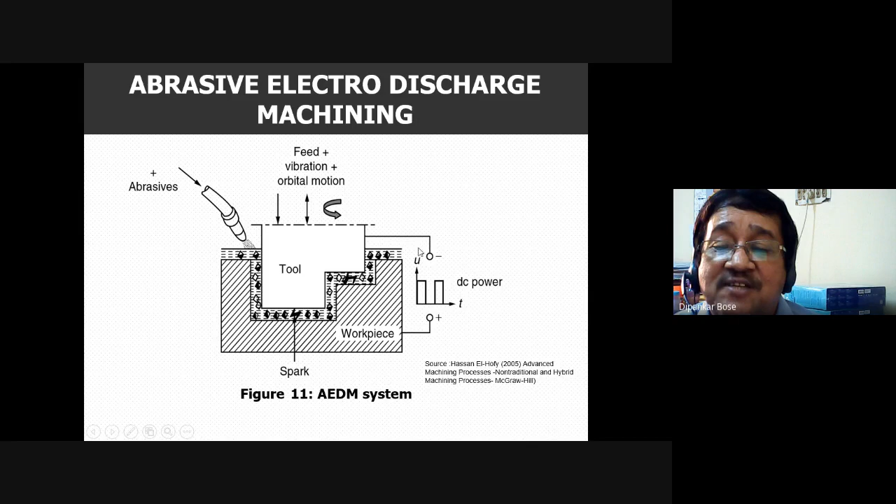Now, my dear friend, you see this. Here the tool feeding, vibration, orbital motion, everything takes place. At the same time, abrasives are fed to the workpiece, and this DC power source is there.

Now here you see AEDM, it is nothing but abrasion plus EDM. So what we are getting is mechanical abrasion phase and EDM phase, where abrasives and plasma are generated. Ultimately, with dielectric plus abrasive, the material removal takes place.

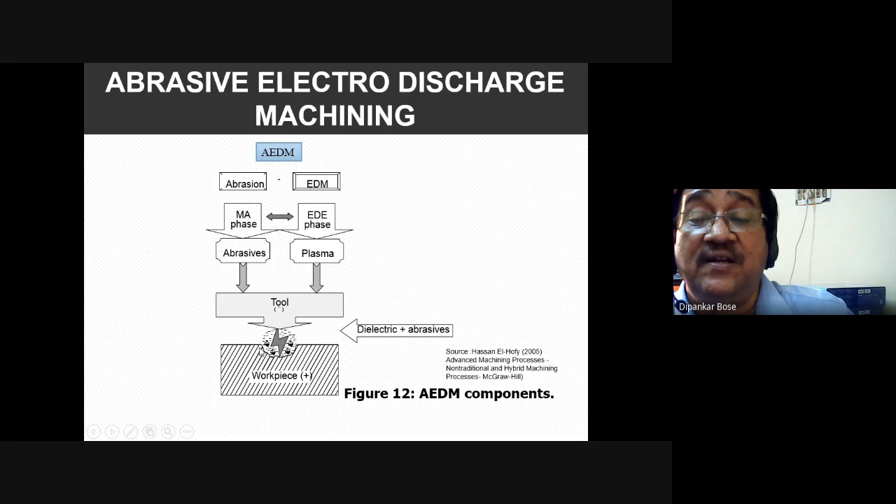Now, AEDM, what is the plus point? The finishing you will get is simply a mirror-like finish, which is uniform and free from cracks. Now this AEDM is widely used to produce dies without the need to remove the heat-affected layer using mechanical polishing.

AEDM is used to produce plastic molding dies. AEDM is very much utilized for surface characteristics of tool steel. Now sometimes fine tungsten carbide powders are added to the dielectric, which adds alloying elements and hence enhances the hardness and corrosion resistance of tools and dies. So this is really a special kind of invention, my dear friend.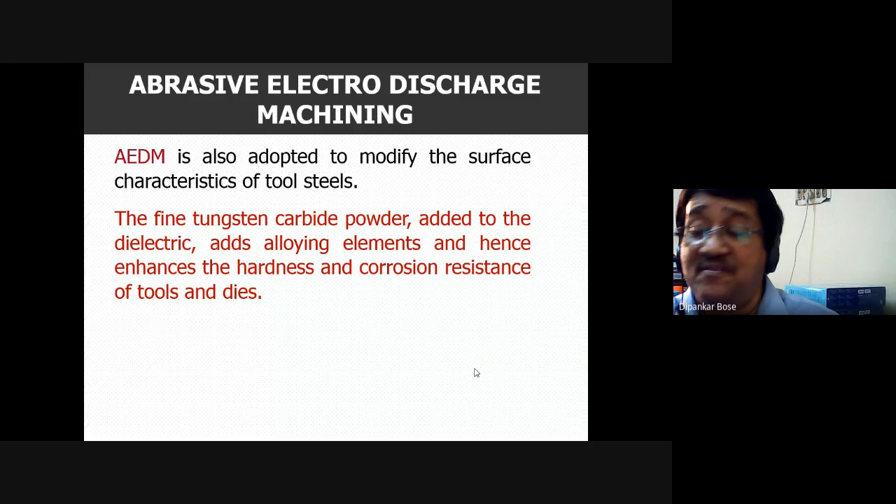And also it improves their tribological features and changes the surface roughness. Now, at the same time, powders such as silicon and tungsten have been used to harden and increase the corrosion resistance of steel workpieces. When we are facing these problems of corrosion and others, so many things are developed, but we have found that hybrid machining is a better approach.

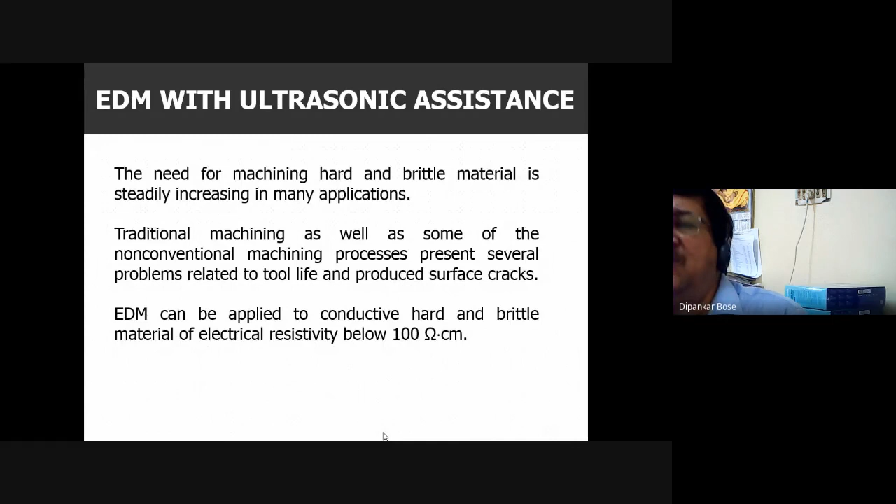But nowadays, EDM with ultrasonic assistance is used when the need for machining hard and brittle material is steadily increasing. Several problems exist with traditional machining in terms of tool life and surface cracks. So EDM can be applied to conductive hard and brittle material when electrical resistivity is below 100 ohm centimeter. But what is the major drawback? Low efficiency of sparking and formation of open circuit, arc, and short circuit pulses, which are non-productive with respect to the material removal rate.

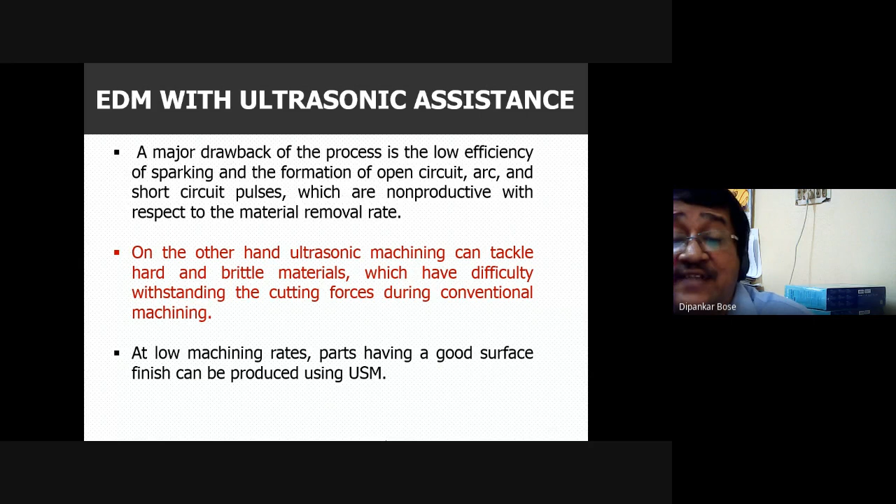But on the other hand, ultrasonic machining can tackle hard and brittle material which have difficulty withstanding the cutting forces during conventional machining. Now at low machining rates, parts with a good surface finish can be produced using USM. But when the interaction between EDM and ultrasonic vibrations in the machining process, known as EDMUS, has greater productivity than the sum of the productivity of individual EDM and USM at the same machining condition.

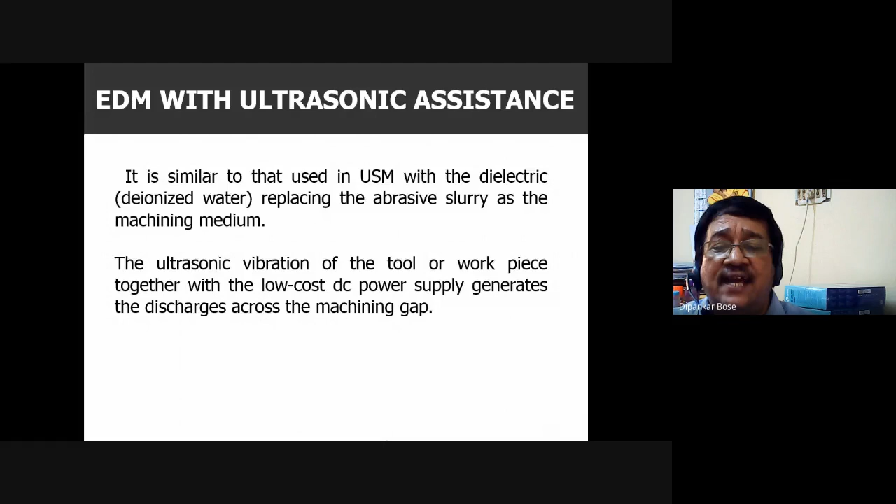That's why this process is adapted for rapid production of graphite electrodes for EDM, where cutting, drilling, and engraving can be done easily. Now it is actually similar to that used in USM, with the dielectric or deionized water replacing the abrasive slurry as the machining medium. Now the ultrasonic vibration of the tool or workpiece, together with the low-cost DC power supply, generates the discharges across the machining gap.

Now the MRR in EDM with ultrasonic assistance employs the electrodischarge phase for melting and evaporation of the workpiece material, by the plasma channel, in a way similar to normal EDM. But the intensity of the discharging action actually depends on the working conditions, such as the gap voltage, amplitude, frequency of ultrasonic vibration, as well as gap flushing condition.

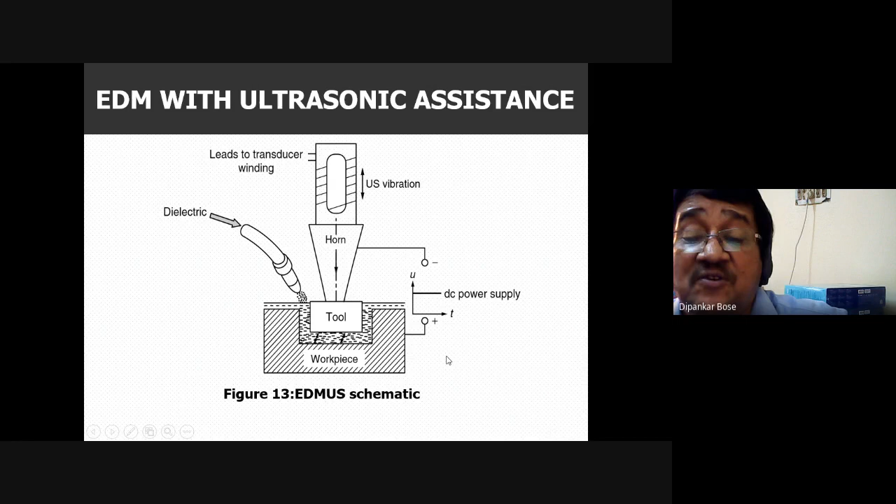Now, my dear friend, this setup is like ultrasonic combined with EDM. It is a newer kind of setup that has been developed. It is popularly known as EDMUS. So actually, because of ultrasonic vibration of the tool, its front surface moves down towards the workpiece surface and the electric field intensity increases.

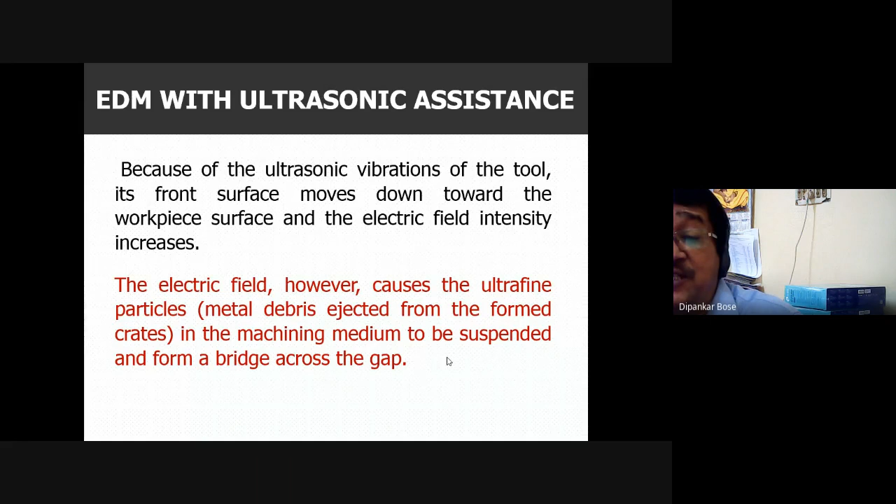But this electric field causes the metal debris in the machining media to be suspended and form a bridge across the gap. So my dear friend, EDM, the electrodischarge phase, then plasma, ultrasonic vibration, dielectric - the material removal takes place.

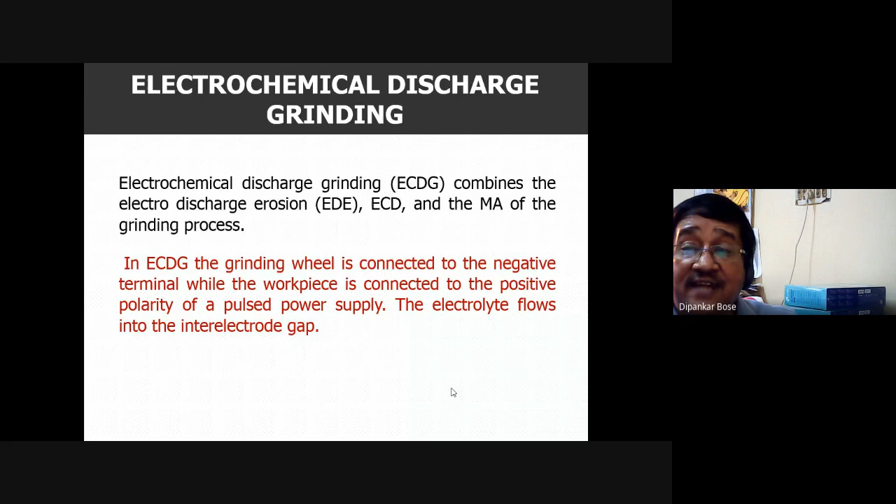Now, electrochemical discharge grinding, this is also another methodology, my dear friend. It is known as ECDG. It is combined with electrodischarge erosion, ECD, and mechanical action. Here in this ECDG, the grinding wheel is connected to the negative terminal while the workpiece is connected to the positive polarity of the pulse power supply. And electrolyte is flowing into the inter-electrode gap.

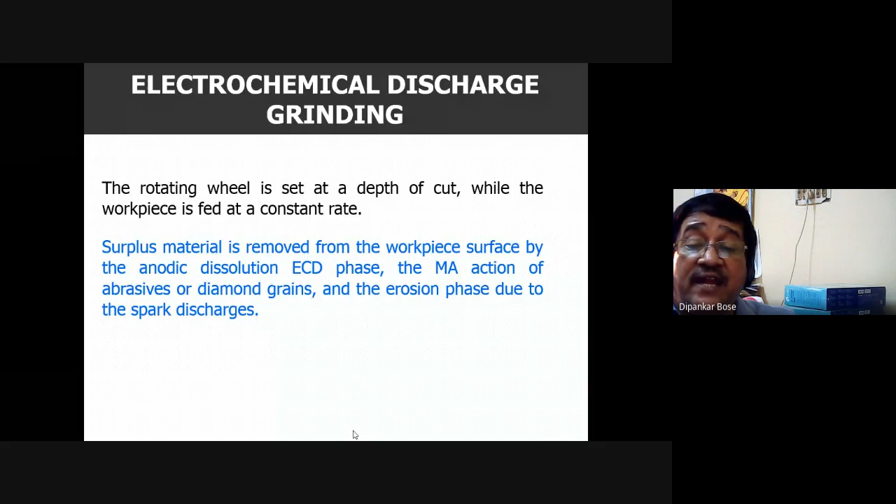And this rotating wheel is set at a depth of cut while the workpiece is fed at a constant rate. In this case, surplus material is removed from the workpiece surface by the anodic dissolution of the ECD phase, and the mechanical action is also there - abrasives or diamond grains - and the erosion phase due to the spark discharge.

Those in the manufacturing world must always remember your main intention: higher MRR and better surface finish quality. To achieve this, all the flaws of conventional, non-traditional machining - I say conventional because EDM and ECM have now become very conventional type - they have got some inherent difficulties, and that is removed by hybridizing.

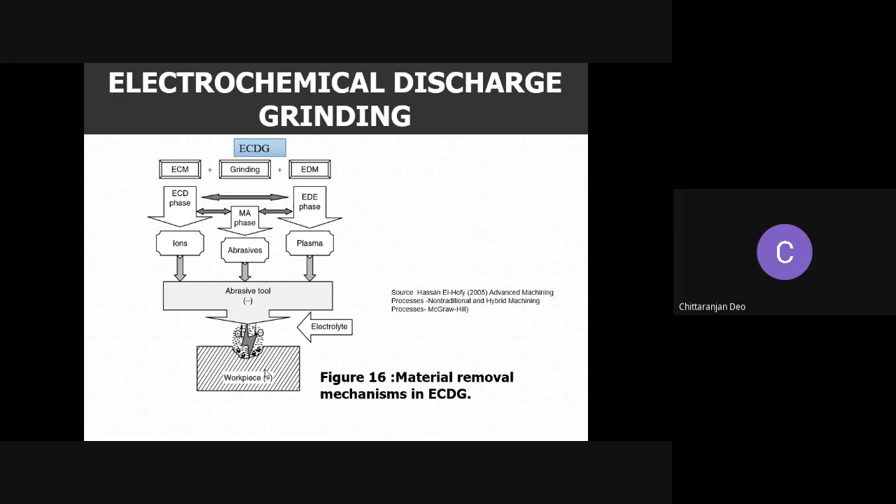Nowadays, my dear friend, everything is obsolete. Now metrology is called vision-based metrology. You go to a shopping mall - what happens? They are scanning, and through scanning you get the reading. Same thing here. Note down the term vision-based metrology. In all industries, they have adopted this vision-based metrology.

Only optical scanning is used to measure the very difficult shapes of components nowadays, which are very hard to measure with conventional measuring setups. So only optical scanning is done. Now we have procured a thermal camera recently where you can find out the dimensions through the camera.

So you have to move with the modern systems - that is very much required. Vision-based metrology, or optical metrology, is very much needed. In a shopping mall, have you seen what the person does? Simply with the barcode, they scan it. The same system is coming into industry already.

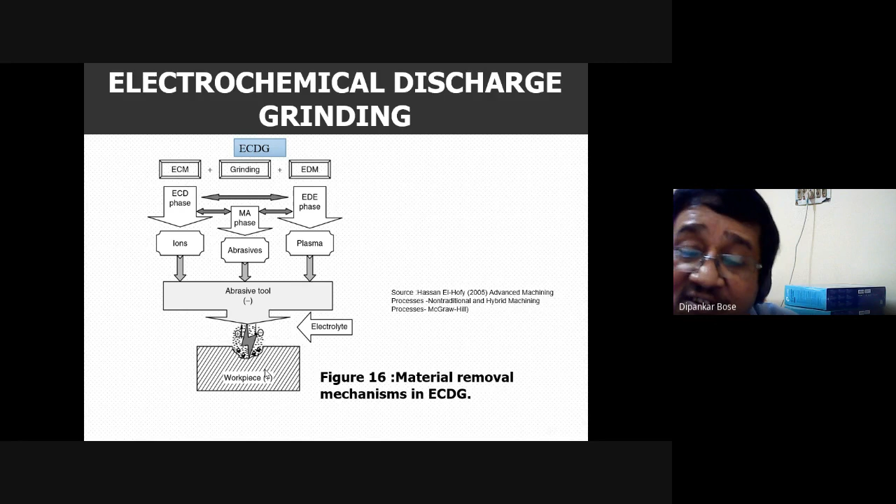Earlier it was there. When production units used to produce so many similar components - nut bolts and others - they used to check them with gauges, and some parts were rejected, some accepted. But nowadays everything is accepted, because all machines now have an inherent checking system, or feedback system. So whatever comes out from the machine has no flaw. So why would you require quality control? The concept is changing in the manufacturing world.

Another example is the process of electrochemical discharge grinding, due to the application of pulse voltage in electrolytic solutions. The most common electrolytes are solutions of NaNO3, NaNO2, NaPO4 and KNO3 - so many types of common electrolytes. Now it is customary to use ECDG electrolytes with surfactants, corrosion inhibitors, and complex-forming agents.

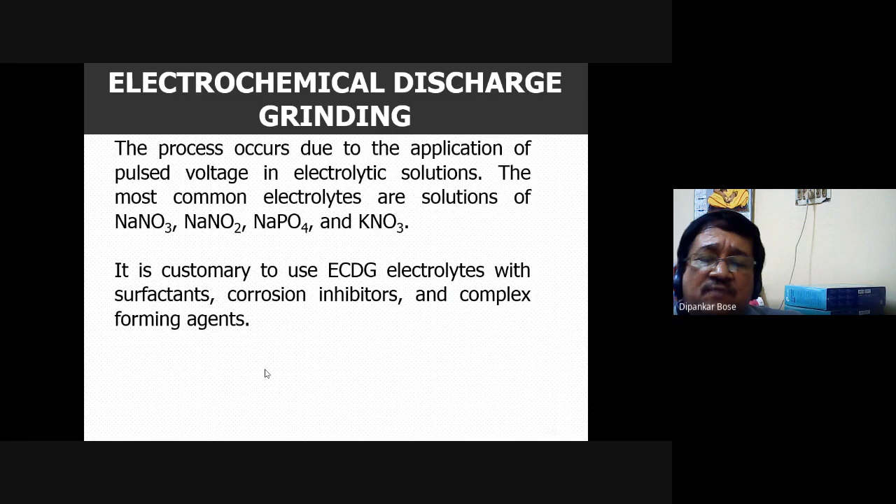So, anything you want to tell me, I can discuss with you. Some references I am giving you now - you can have this book especially, by an Egyptian author. This book is very good. Does anybody have this book? You can get it on the internet - through Google you can find it.

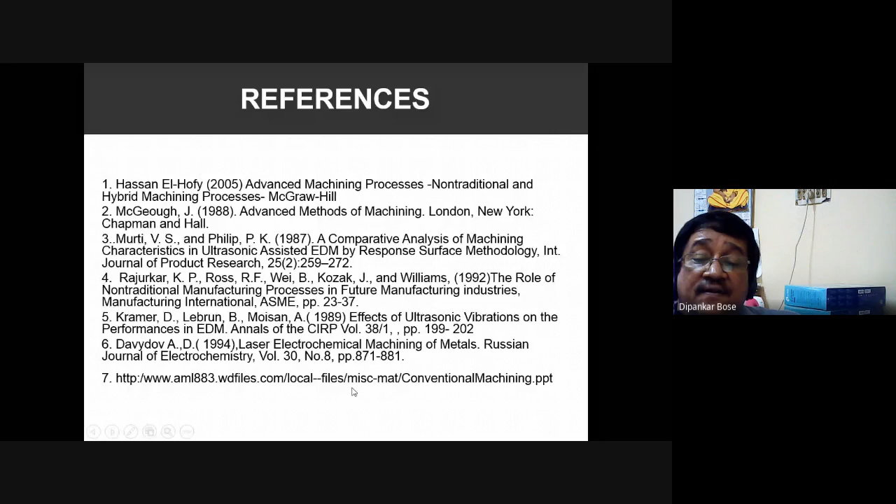Now, my dear friend, any question? Any question? It's difficult - in 1.5 hours, very difficult.

My sincere request to you - I have given some idea to you, okay? But now it's your job. Always innovate - innovation is the most important thing. This is an era of startups. Don't worry about jobs and such; only the idea matters. You got my point? One boy from Mumbai was actually a class 9 pass, and he got directly admitted to Berkeley University from Mumbai. Why? Because the boy had 156 patents.

You got my point? So that's why, because your great professors from IITs or Jadavpur, generally they are good researchers. So they will pinpoint their lecture on a particular research area, whatever they are doing. This is also very good, what they are giving to you. But I wanted to give you the area where the total non-traditional concept has just destroyed conventional non-traditional. I am telling you, it is a conventional non-traditional. Okay, this has also now become bad.